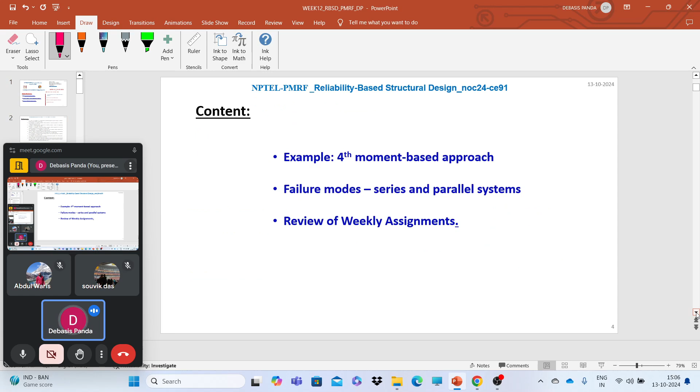So first, the fourth moment based approach, FORM. You have already gone through the lectures of week 12, so you will find that the course instructor has described 40 years of development of FORM, but we will not go into that. We have already gone through the Hasofer-Lind reliability index and how to solve the first order reliability problem using the Rackwitz or Rackwitz-Fiessler algorithm. We are very familiar with that, so we will not spend more time on that.

So basically, the 40 years of developments covered by this course: first the definition of the Cornell reliability index, then the limitations of this reliability index, that if we change the format of the limit state function, the final estimate of beta may change. Then the Hasofer-Lind reliability index came, and this lack of invariance problem was addressed.

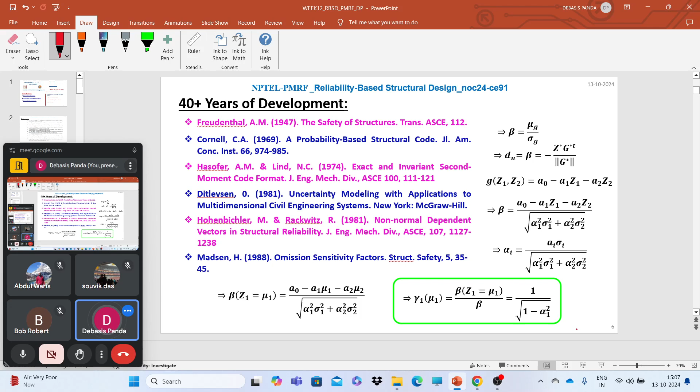We will not go deep into that. You can go into it if needed, but FORM and the simulation based techniques are enough to find the probability of failure and reliability index. This fourth moment based approach is one of the developments done in past years. In 2007 they came up with this approach, suggesting some approximation to the limit state function. We will not go into it directly, we will go to the algorithm.

Today we will focus on solving the questions and figure out which kind of questions we will be focusing on. These kinds of questions will not come in your final examination: what is the Fisher-Cornish expression for this reliability index? And quite frankly, this kind of approximation works for this particular problem. If you try to solve different kinds of problems with this approximation, you will not find convergence.

If someone is interested to find out how we can work out this kind of reliability, they can go through this paper, how they solved it; they also add some examples of how they solved beta. So we are not interested to go there. I added these slides just because of some questions in week 12 associated with this fourth moment based approach.

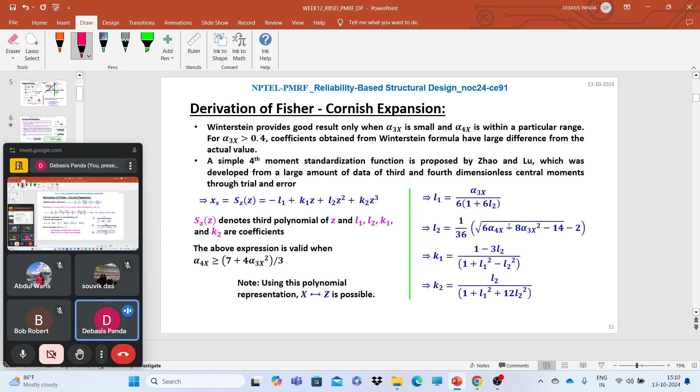If we look into the algorithm, it is similar to the response surface method, but the approximation is different. They start with the limit state function, then evaluate L1, L2, K1, K2. How to evaluate these values is given in the paper. Then evaluate the third and fourth moments. These expressions are also given in their paper, with some limitations, like which domain or range it will act.

Like here for the fourth moment, they have suggested that if this condition is satisfied, then the reliability estimation will closely match the first order reliability estimation using the Hasofer-Lind reliability index. Mostly for the Rackwitz-Fiessler algorithm, we have guaranteed convergence. Then the X to Z kind of expression is also given there in reliability analysis.

So we will not go into that. If we need to solve them during the assignments, then we will come back here and we will see. So main thing, we will first see failure modes. We will spend some time on the failure modes; one or two questions may come from these failure modes. Short, rapid fire type of questions may come from the failure modes.

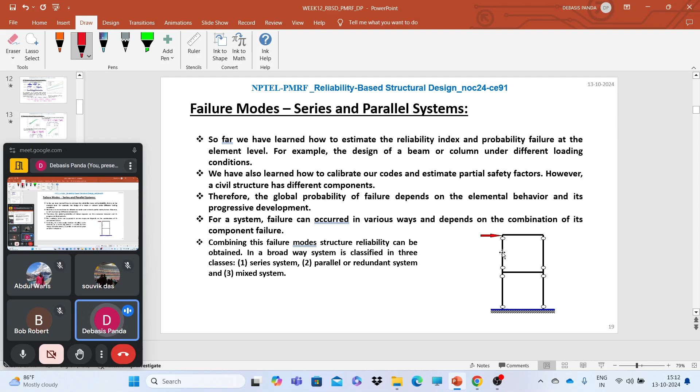Like here for this building, at the element level, for this beam or for this column, we want to solve the reliability. We can first develop G(X) with respect to failure, which kind of failure we are looking at. With respect to that, we need to find out the capacity and demand, and based on that we form our limit state function G of X, and that is nothing but capacity minus demand.

And capacity and demand, like if we want to look into the plastic failure, or for a beam, if we want to analyze with respect to the flexural strength. So different kinds of limit states may form as per our requirement, and different kinds of random variables may be there. So we can work out this local level or element level probability.

Now if we have the whole system, how can we use this information of the element level reliabilities to work out for the whole system? So we need to identify which kind of system we are talking about for global. We can have a series system, a parallel system, or a mixed system. That means a mix of series and parallel systems.

Okay, so here for the series system, what do you know? We have all seen series and parallel systems, like with resistances; we have already learned which kinds of systems we call series and parallel. So series system, what do you know about it? If we have any kind of failure in this system, that governs the total failure of the system, right? So here in the schematic diagram of the series system, we can see that n number of elements are connected in series. If one of these elements fails, then the whole system will fail.

This series and parallel system, what should we discuss? If we have a series system, we know that if one of the elements fails, the whole system will fail. So we can get the probability of success as 1 minus probability of failure of individual components, multiplied together. And if we have a parallel system, what we need to do is just 1 minus probability of failure of the system. That means in series, one of the elements failing causes failure, but in parallel, the rest of the structure will survive until all elements fail.

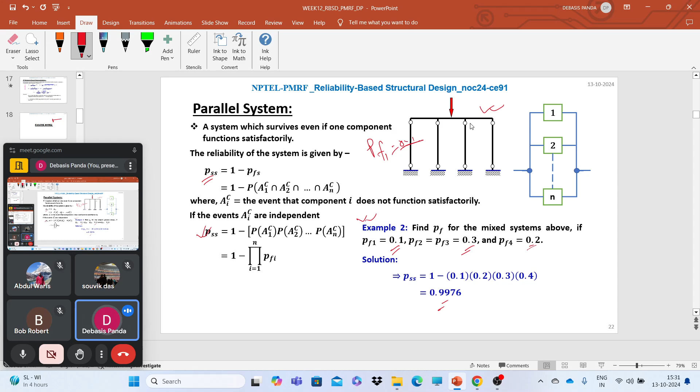But this kind of thing is sort of hypothetical. If one of the elements fails, we will not consider this building as a safe building. Will you go to the building if one of the elements has failed? But my reliability calculation will say, okay, my system will sustain. So we need to figure this out, or if someone wants to go deeper, they can work some examples and check whether this actually aligns with simulation-based techniques or not.

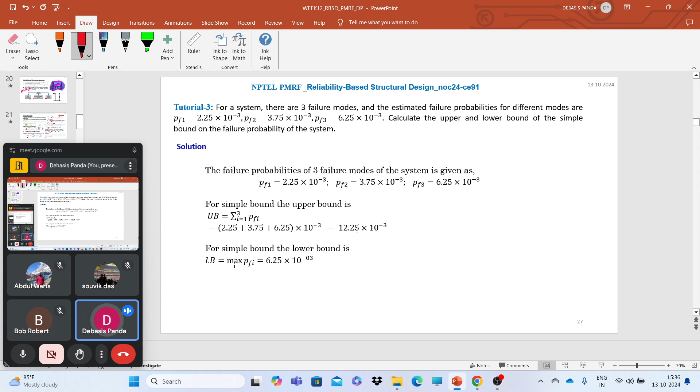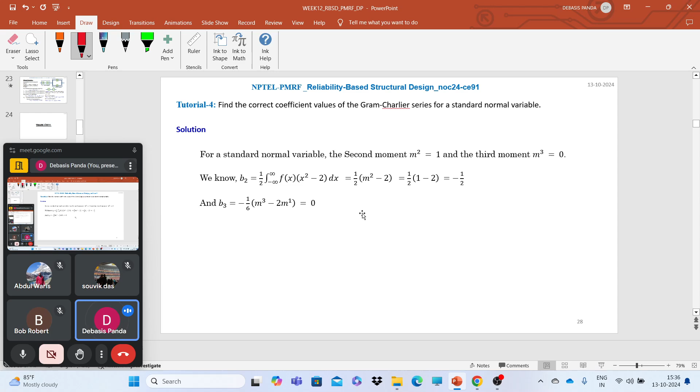Here's a short question. Find out the correct transform technique for a non-normal variable to standard normal variable if a standard normal variable is given. In your lecture video, in the third or fourth lecture, sir has already explained for the standard normal, log normal, and exponential distribution. So for the log normal transformation it's this, and for exponential distribution the transformation function will be this. And this kind of question will not come.

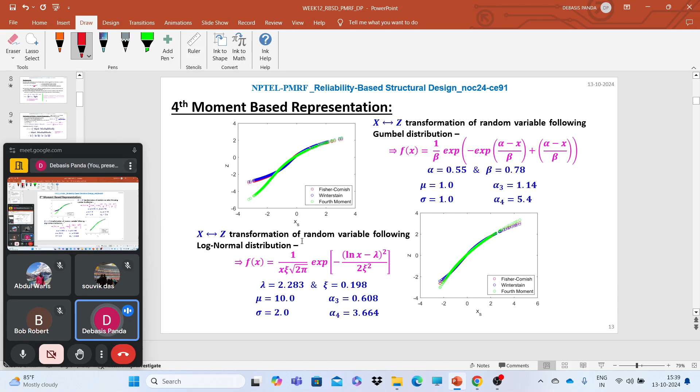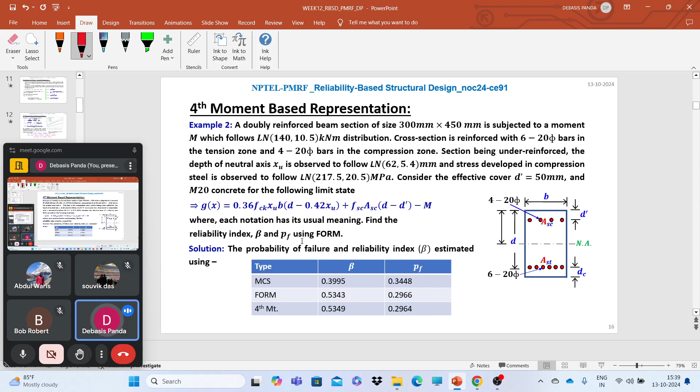But personally, I don't like this kind of representation because I tried it with this frame problem, then this double reinforced beam problem. For these two problems, it gives a close result with FORM and MCS. But when I tried it with the nonlinear problem, it just failed, failed terribly. But you can go into the codes, I will upload the codes for the fourth moment based representation.

But for me, I don't like this approach. If you want them, I will upload the codes, no problem.

Here also for the fourth moment based approach, if you go to lecture 32, you will find out what should be the L1, L2, K1, K2 coefficients. It's nothing but this, so B and C will be the correct answer. That means, select the correct statement about the fourth moment, the proposed standardized moment. This is the limit state function they proposed, so B. And what are the limitations?

The limitation is like this: above this range, the fourth moment, which is nothing but the kurtosis of the standard normal distribution, the kurtosis value is 3. And if the kurtosis value is 3, this fourth moment based approach will give an infinity result, meaning it will terribly fail. So this is actually the limitation of this fourth moment based approach. It's valid when alpha 4x is greater than 7 plus third moment squared by 3.

That means in a way they limit the fourth central moment below 3. That's all. If you go to that slide, you will find the detail about the fourth moment based approach.

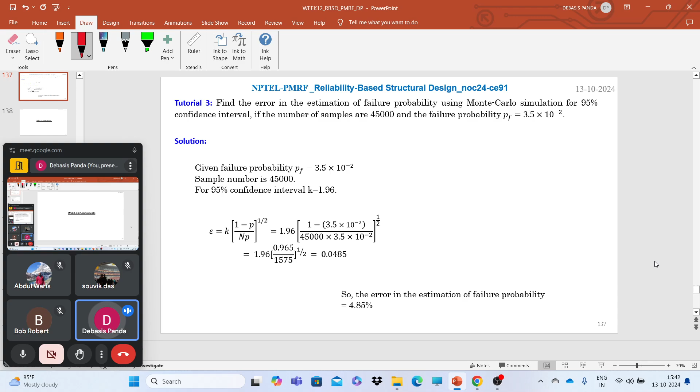If we have our model ready in mechanical APDL or SAP, we can use MATLAB in batch mode to find out the delta in each iteration. If we have time, I will explain it, or I will directly upload the codes, both the implicit form and MCS. You just go through it, the code is self-explanatory. You just need to install mechanical APDL and MATLAB in your system.

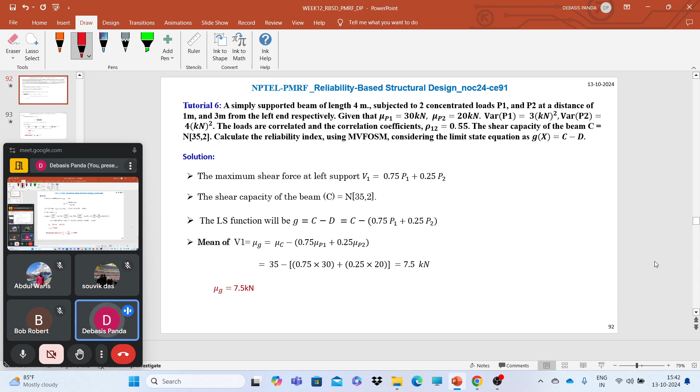So quickly let's go to our main discussion, like which kind of questions may come in the final examinations. For week 12, we haven't spent that much time, we just went like a bullet train. I hope you can figure it out, all the questions I have discussed, you just put them in your assignments and get it done. Now, first thing, the discussion.

So in your final exam, you will have 40 multiple choice questions, like rapid fire type questions, 1 mark each. And all the questions, more than 90% of them will come from your assignments.

Multiple choice question means 1 mark questions, I'll show you which kind of questions. Now you will have numerical and MSQ type questions, 15 questions of 2 marks each. Here, for the MSQ type questions, you need to pay more attention, like 2 or 3 options may be correct. So you need to focus on which options are actually the correct answer.

And you have 10 questions of 3 marks. And I can tell you, if you solve the questions up to week 5 and week 11, those are the most important questions. And I can assure you, if you solve all the assignments and all the problems I have given here, you can solve more than 99% of the questions.

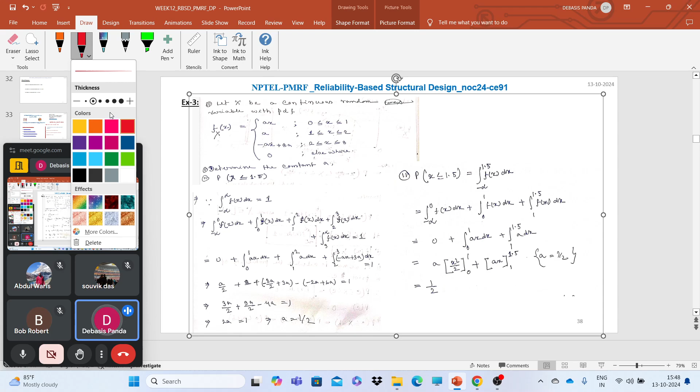Second, one question will come for the continuous random variable, the PDF will be given, the probability density function will be given. Over the range, some constant will be there, you need to find out the value of the constant. Now what is the approach to solve this question? It's nothing but, we know, for the whole domain, the integral of my PDF f X of x dx will be 1.

So if this kind of question is given, like f X of x over the range 0 to 1 given as ax, over the range 1 to 2 given as a, over the range 2 to 3 given as minus ax plus 3a. So what you need to do, you need to integrate all the things and equate to 1, because we know the area under this PDF is always 1. I am here drawing the normal distribution, but for all distributions, the PDF over the range integrates to 1. So you need to figure out what should be the constant.

Now once you have identified the constant, for a point like 1.5, what should be the probability of failure less than equals to that? That means you need to just integrate up to that point. Like here if we have 1.5 value, what should be the probability of failure less than equals to that value. That means you need to calculate the area under this curve, you just need to integrate up to that point.

Okay, if it is the standard normal variate, that means you just figure out phi of that point, x minus mu. Clear? So this kind of question, a 3 marks question, will come where you need to find out the value of this constant a, and you need to figure out for some interval or some point what should be the probability of failure. Clear?

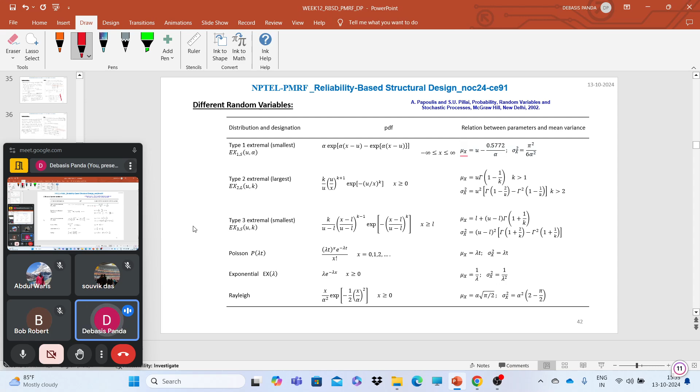So for distributions you need to recall first the exponential, type 1 largest, type 1 smallest, and the log normal distribution. Clear? The parameters associated with those 4 distributions you need to recall. You need to remember.

And the third type of question is for the standard normal variates. Here the standard normal table will be given to you, like for the range. You already have seen in your assignments, phi and z values will be given. All these things will be given, mu, sigma. Like for this M25 grade of concrete, it follows normal distribution with mu 31.57 and sigma 4.32. What will be the probability of getting a strength less than or equal to its design value? The design value is 25.

So here what you need to do is just phi of x minus mu by sigma, where x is the desired value here, that is 25. This is the mean, this is the standard deviation. The phi of this value you will get from the standard normal table. Sometimes you need to do some linear interpolation, but I think in the questions there is no need to interpolate the phi value to get the answers, but this kind of question you will see.

So from the first modules you will get more than 60% of the questions. First 3 modules, more precisely. I'll come to it. So three types of questions from here you need to recall. For the log normal distributions also you can find it out. Similar kind of thing, phi value. Just recall this final expression for normal and log normal.

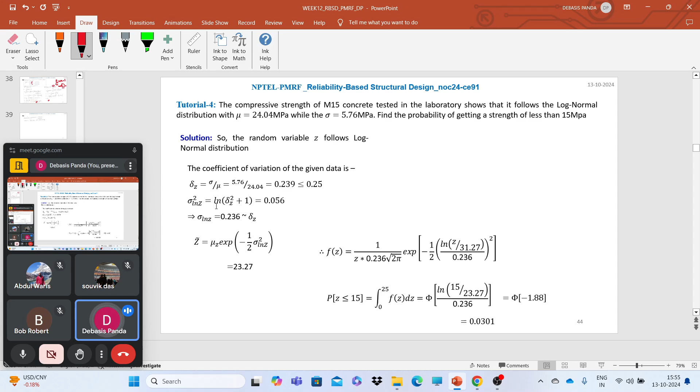So two types of questions. One, for the normal distribution it is nothing but phi of x minus mu by sigma. For log normal distribution, phi of ln x by x tilde over sigma ln. That means you need to find out the x tilde value and sigma ln. A while back I already told you that for this distribution you need to recall the parameters. And exponential distribution. What is the exponential distribution? I need to figure out the exponential distribution.

That rainfall question we have already solved. That question, just go through it. And one more thing here. Yes, this kind of question: what should be the mean and variance? This is nothing but a question from the algebra of variance. How we find the mean and standard deviation for this kind of question: it's a linear system.

Here the total load for a column is given. Your limit state function is given as S, dead load, live load, wind load, and dead load follows normal distribution, live load follows normal distribution, and wind load follows normal distribution. Find out the mean and standard deviation. That will be a 3 marks question. How can you figure it out?

The mean: it's a linear equation, so mu of D, mu of L, mu of W, just add all the mean values. What will be the variance? It is nothing but sigma square L, sigma square D, sigma square W added, and you will find out the standard deviation from this. Now once you have found these two, you can easily find out the probability of failure. That means all the things we need to recall are actually linked to each other.

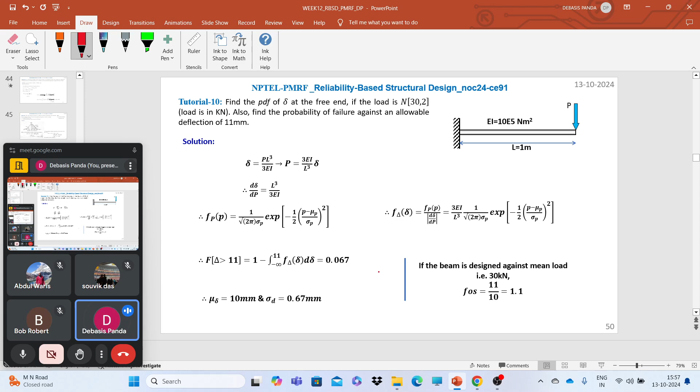For distributions, out of these four, two distributions are very much important: normal and log normal, then your exponential. And for the type 1 largest, you need to find out the parameters. Three types of questions. Now this is a similar kind of question. It's a nonlinear equation, so you can find out mu and delta according to it.

Here is this question. Now look, here we have a limit state function S is equal to M by Z, P by A, M, P, A. The distributions of these things are given along with the parameters. Now what should be the variance and mean of these things? So mean is nothing but mu M by mu Z, mu P by A, because A is your deterministic quantity. So we can easily find out the value of mean.

And what should be the sigma square value? It's nothing but 1 by mu square. That means 1 by mu Z square into sigma M square plus. That means you need to find out the derivatives of these things and add them up, and you will get the final expression. So variance of these things, when we have a nonlinear function, we need to get the derivative with respect to the random variable, and put this in this equation. So when i is equal to j, you will get the square term.

So this problem, just recall this problem. Already we have discussed this problem in week 1, during the week 1 assignment solving session. Now one more thing, these are all the same kind of things. If my limit state is given, what should be the mean value? This will be my mean value. What should be the variance? Nothing but del MR by del B square into sigma B square. That means you need to find out the derivative with respect to the random variable and multiply it with the sigma square of this particular random variable. That's all.

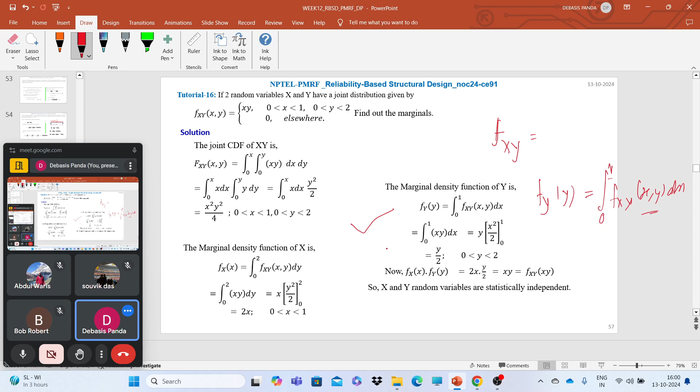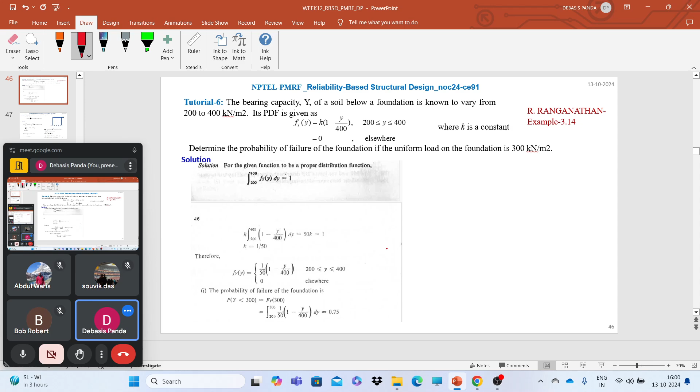Great. Okay, so from week 1, the kind of questions you need to recall or practice are these. If you practice these questions we have already solved, you can solve 100% of the questions given from week 1, and week 1, week 2, week 3 have the most weightage. Okay, clear which kind of questions you need to practice from week 1? Yes. Okay, great.

So move to week 2. In week 2 we have moment generating function, method of moments, and maximum likelihood function. Now from goodness of fit, like chi-square and KS test, you will have one or two MCQ type questions. And one question will come from the moment generating function, because in our assignments the weightage regarding moment generating function is given mostly. So I will show you some examples.

Like here we need to find out the moment generating function for the discrete random variable. So recall how we can find out the moment generating function. Moment generating function is nothing but the expectation of e to the power xs. So if we have the PDF on our side, e to the power xs we can easily find out, but this kind of bigger expression will not be given to you, where you need to solve the integration. But if this question is given, how much time will you need to solve it, tell me?

So you can expect one question from moment generating function. So just go through the moment generating function questions, whatever we have discussed during week 2, like this question, and we have again this type of questions. If we have a discrete random variable, the PMF is given: for x equals 1, it's 1 by 4, for x equals 3, 3 by 4.

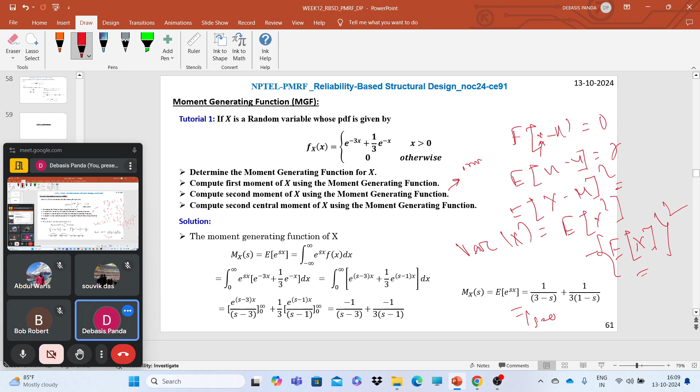And what will be the second moment about the origin? The second question asks to compute the second moment using the moment generating function. That means you just need to get the second derivative of the moment generating function with respect to s, and at s equals 0 you will get the second moment about the origin.

So here you can see the second derivative of the moment generating function with respect to s. Now if you put s equals 0, you will get this. So this is nothing but the second moment about the origin. Once we have the second moment about the origin, you can easily find out the second central moment, which is nothing but the variance.

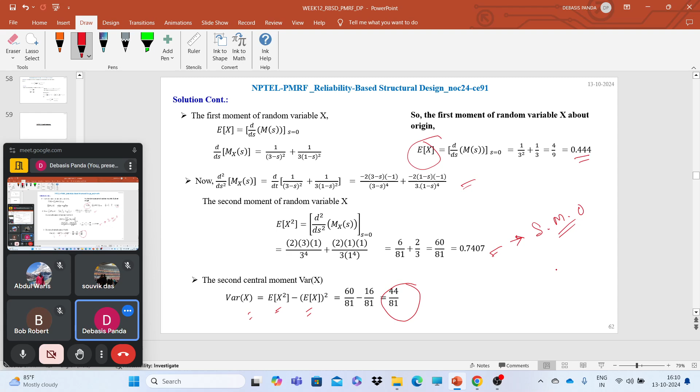Variance from variance algebra is E of x square minus E of x the whole square. So we have E of x and E of x square, the mean and mean square value, and we can find the second central moment. The first central moment is always 0, the second central moment is the variance, the third is skewness, and the fourth is kurtosis. So mean is always the first moment about the origin. Okay.

Now here you can have a 1 mark or 2 marks question on biased and unbiased estimation. The estimator, or the sample estimator, will be given to you, and the question will ask which one is the unbiased estimate of the mean or of that parameter. This kind of 1 or 2 marks question may come. Like here you have already solved z1, z2, z3.

If the expectation of the estimator is equal to the population parameter we are looking at, then we can say this is an unbiased estimate. If these two are not the same, that means the expectation of the estimator is not equal to the parameter, then we can say this is a biased estimator. So here two estimators of z1, z2 up to z9 are given, theta 1 and theta 2. We need to find which one is the unbiased estimate of the mean.

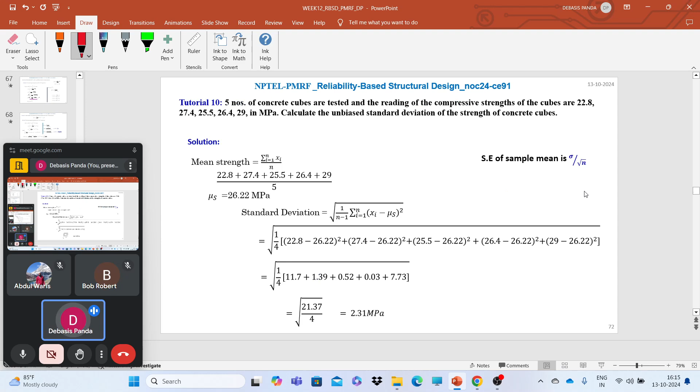Also just recall this, for the sample mean and sample variance, what should be the unbiased estimate. So for the sample variance, the 1 by n minus 1 summation of x minus mu whole square for each sample, that will give us the unbiased estimate. This is a 1 marks question. And from the method of moments estimate, here it's nothing but you just add them up, you will not get that.

Now, you will get 2 or 3 questions from the maximum likelihood estimate. 1 marks question you will have from maximum likelihood estimate. Again, you will have a 3 marks question from the maximum likelihood estimate. So here what you need to be

careful about is the questions - you just read whether you are asked to find out the log likelihood function or the likelihood function. In one question it may ask like what should be the likelihood function. For the likelihood function, you just need to multiply them and find out the thing. Here you can see, and for the log likelihood function, you need to add the log on both sides. So from here, likelihood and log likelihood function, you will have 2 to 3 questions.

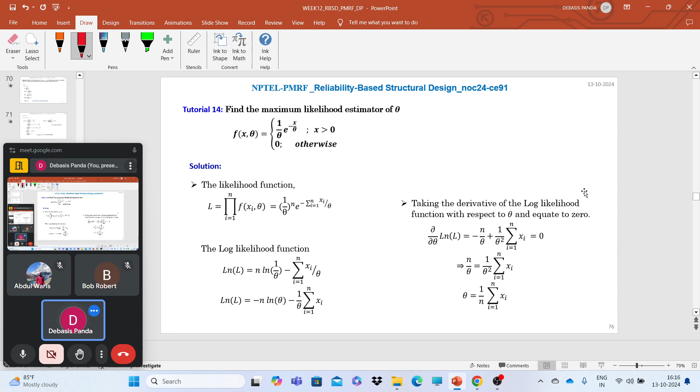2 questions of 1 marks, and I think 1 or 2 marks question may come from this topic. So already we have figured out different kinds of questions here, and all the questions given in your assignments, you just go through them one by one. Already this kind of questions are given, like what should be the likelihood function, what should be the log likelihood function - very simple type of questions. All the answers will be given. You don't need to find out the parameters, but you will be asked what should be the expression for the likelihood and log likelihood estimate. Clear? Likelihood and log likelihood estimate.

And be careful - in the options, both the likelihood and log likelihood correct answers will be given, so be careful with the answers. So from the log likelihood function, you can expect 2 or 3 questions - simple type of questions, what should be the likelihood function, what should be the log likelihood function, that's all.

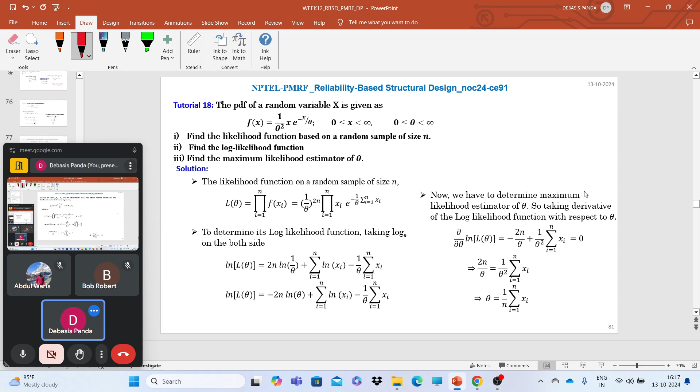Now from week 3, you will have most of the 3 marks questions. First, most of the 3 marks questions will come from week 1, like what should be the mean and variance for a given system, what should be the probability of failure up to this point, what should be the k value for these things. So 2 or 3 questions you can directly expect from the first module, and the rest of the things from the MVFOSM and the definition of Cornell reliability.

That means first you need to figure out what should be my mu and what should be my sigma of the limit state function, and what should be the beta. So for this question, you can easily figure out what should be the mean and standard deviation of the limit state function.

So the limit state function is given in this format, and the format also will be given to you, which format you need to follow. Like here, if I change the format to 1 minus d by c, the estimate of beta will change. That actually leads to the lack of invariance problem, right?

So this kind of question, 3 marks question, will obviously come. I think this kind of question will come, like the axial load carrying capacity of column is given, the capacity is given, the demand is given, the limit state is given. So what should be the reliability index for this problem, and you need to enter the range of this value.

Okay, so for this problem you have the limit state function c minus d. So what will be mu g? Nothing but mu c minus mu d. Already we have the parameters corresponding to the distribution, so I can easily find out what should be my mu g, what should be my sigma g. It's a linear function, so it's nothing but sigma c square plus sigma d square, so I can get the standard deviation.

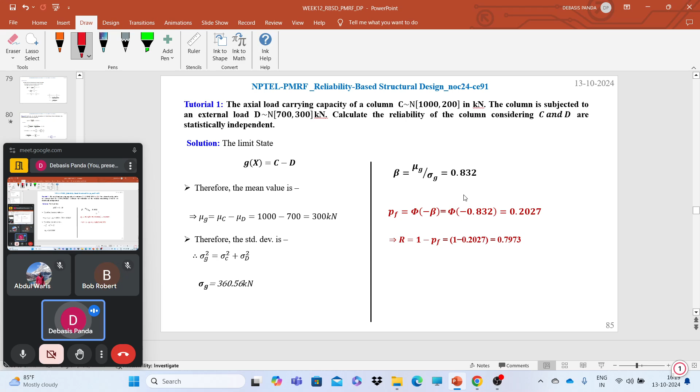Once I have the mean and standard deviation, using the Cornell definition, it's nothing but mu g by sigma g. Now further, if asked what will be the probability of failure, obviously in a tabular form the phi value will be given, but we will not go up to that. So up to this, what will be the beta value corresponding to that limit state function? This kind of question will ask.

Okay, so for this big question you just don't need to go far, like a simple kind of limit state will be given, where you can solve it within 2 or 3 minutes.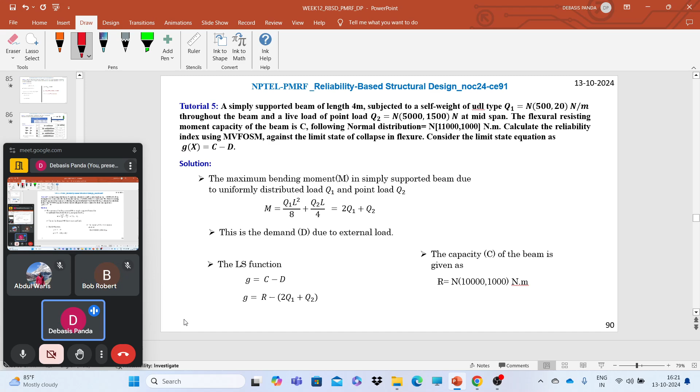Okay, 3 marks question. Here also we have another question, like here the covariance is given. So if covariance is given, you can also find out what should be the variance, mean and variance, and the corresponding beta. Great, okay. So beta from reliability index, 3 marks question.

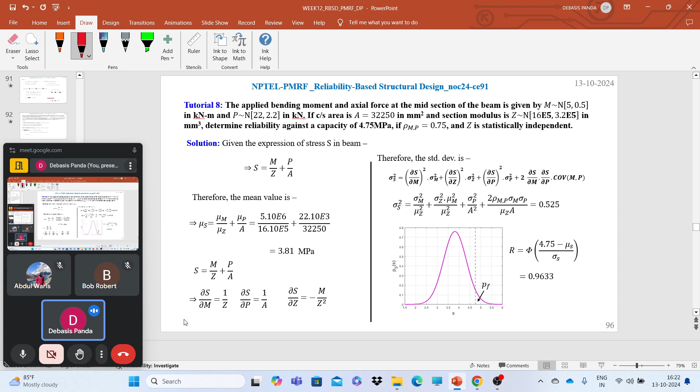Here also, just go through these 3 or 4 problems added here, just go through them. Already we have discussed these things. This question is also important. Okay, mu you can find out, sigma you can find out, beta you can find out. Now from week 4 we have the FORM.

Now the big question, from first order reliability method, which kind of question may come here? Very simple kind of question will come, like here this kind of question. Your z will be given directly, the gz will be given, your alphas will be given. Calculate the beta for the first iteration, and your limit state will not be this big. It will be a simple linear limit state where we just need to find out the beta value.

That means what you need to do, already if it is given in the z space, obviously it will be given in the z space, because from x space to z space you need to convert it. So it will take some time.

So I think directly the z-space limit state equation is given in z-space already, in a simple format, you can easily find out the beta, and beta will have only one equation. You will not have any quadratic equation where you need to solve for beta and get 2 or 3 values. You will just get one value.

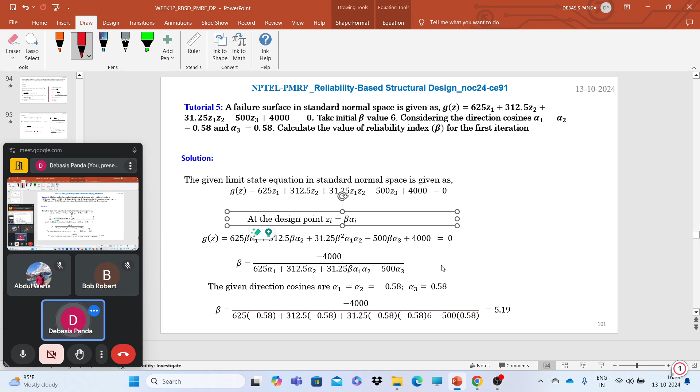What you need to recall here is that in design points, z i equals beta into alpha. We have already seen this many times when we solved using the Rackwitz-Fiessler algorithm. And already we will have alpha 1 and alpha 2. Another kind of question here could ask what should be my alpha 1 and alpha 2.

Say for example, your gz is given like this: my gz is 20 z1 minus 6 z2 plus 220. Now here what will be asked is to calculate the direction cosine of the first random variable.

First random variable means you need to find out alpha 1. So alpha is nothing but minus the gradient of the limit state function in the standard normal space with respect to that random variable, that is dg/dz1 divided by the gradient of g, meaning the Euclidean norm of g. Most of the time the Euclidean norm will be given; if not, you need to find the two derivatives, dg with respect to z1 and dg with respect to z2, and the Euclidean norm is the square root of this square plus that square. Once you have this, you can easily find alpha 1.

And if asked what will be the value of alpha 2, you can easily find it out too. It is nothing but dg/dz2 divided by the Euclidean norm of gz. So this kind of question you may expect.

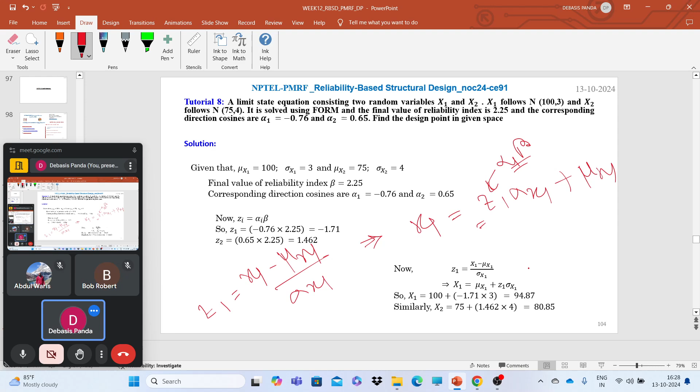This kind of correlated to uncorrelated conversion, you will not have any kind of questions on that.

Now, from week 5, the Hasofer-Lind and Rackwitz-Fiessler algorithm, similar. Like here also, same kind of questions. So you may have three questions from this, and from Cornell's also you have three. That's why I told you, up to the fifth week of assignments, if you solve this kind of question, you can solve 70 to 80% of the questions.

Like here also beta, similar kind of question. Look at the question here, the limit state is given, you just need to convert it into z space. So directly in your questions the g(z) will be given, you need to find out the beta. So you can easily find out the beta here. That means all the values will be given, you just need to recall or remember what was my logic to find out these things, and the simple form of limit state will be given.

Don't worry, these two, this also you can solve. Don't look at the solution, can you solve it within 3 minutes? If this is asked for a 3 marks question, although the limit state is longer here, this kind of limit state will not be given. Like limit state is given, initial beta is given, initial alpha is given. What will be the beta for the first iteration? For the first iteration, you don't need to solve any quadratic equation, it will be a simple linear equation.

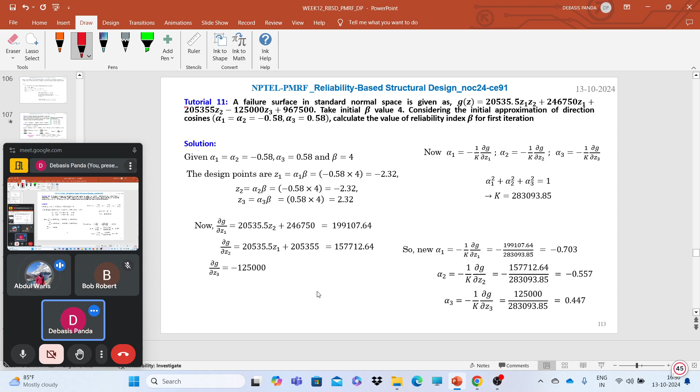Okay, so now you have an idea which kind of questions will come up to this module. Yes or no? Yeah. Yeah. So then

Log normal distribution, I have already told you. This kind of question, a 1 mark question, may come from this, like what should be the equivalent normal. Only for the log normal distribution you just need to recall what should be the equivalent normal, that equivalent normalization equation here, mu x equals x star times (1 minus ln x star plus ln x tilde). The value will be given, like x star value is given here, the standard deviation and mean are given here.

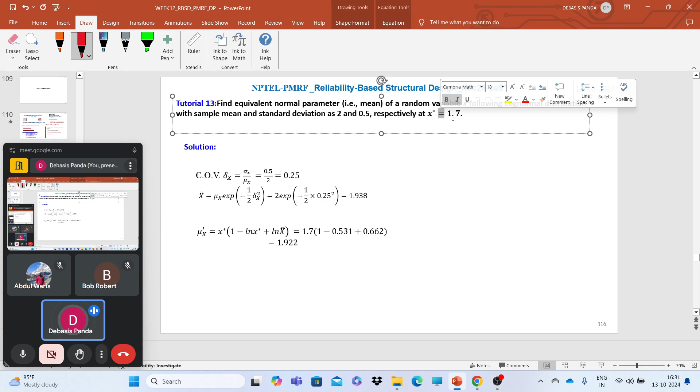So you need to find out the del value first, you need to find out the x tilde value, and you can find out the equivalent normal point for this x. So a 2 marks question or a 1 marks question may come here. If del and x tilde are given, the question will be 1 marks. If you need to calculate these two things, you will have a 2 marks question. That means, according to the four distributions I have told you, you can solve any questions, right? So this also you just go through.

So it's a simple question, and this is only for the log normal distribution, not for the uniform, not for the Gumbel, not for the type 1 distribution. It's a simple expression, x star times (1 minus ln x star plus ln x tilde). So this kind of question may come, but I suppose this question will not come, because the ln value you cannot solve using the on-screen calculator.

I don't think so. Ln is there, no? On the on-screen calculator, you can solve ln. Not sure. I think it's there. Yes, maybe. You can solve it.

So just recall this expression, what should be the equivalent mean for the log normal distribution. Okay, so this kind of question is hardly a 1 or 2 marks question. If all the values are given, then that question will be 1 marks. If all the values are not given, then this question will be 2 marks.

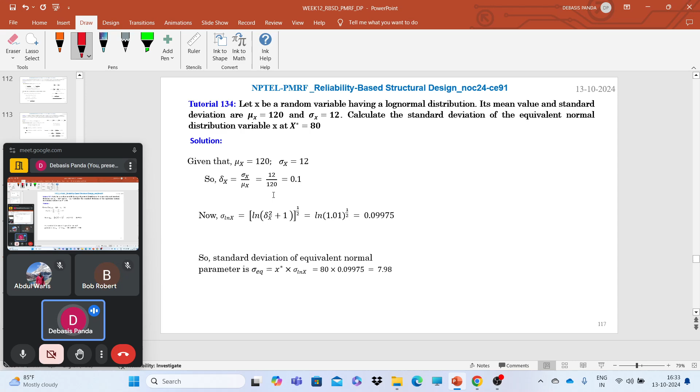So these two questions you just recall, or you just go through them. Okay, this kind of question you will not have, because you don't need to solve the eigen operations. Now, in the Morgenstern and Nataf model, you will have just MSQ questions and simple theoretical questions. You will not get any kind of numerical questions. But one question I will recommend: just recall this formula.

What is the formula to find out the alpha? That means how we can find out the rho value from the alpha value. That means q1 and q2 are given, so from this formula, how we can find out the rho 1 2 value. If x1 and x2 are marginally normal and exponential distributions, and q1 and q2 are given, what should be the correlation coefficient? We know that mod of alpha is less than or equal to 1, and alpha is nothing but rho 1 2 divided by 4 q1 q2, less than or equal to 1.

This formula, all are given. What will be the rho 1 2? That means the correlation coefficient between these two. These two formulas, please recall. That's all. And the 1 mark questions associated with week 6, all the 1 mark questions you should go through them. 1 mark and MSQ questions, related to which statements are correct. Okay, that's all. The rest, you don't need to remember any kind of transformations, Nataf or Morgenstern.

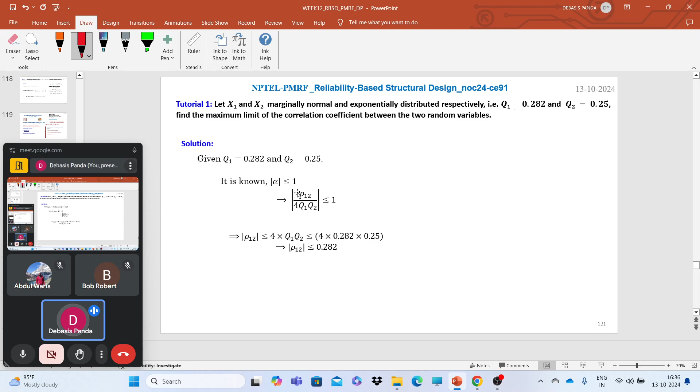First, if we have two random variables, what should be the rho 1 2 if q1 and q2 are given? All values will be given, q1 and q2, you just need to find out what should be the rho 1 2 value. That means what should be the maximum value of rho 1 2 with which we can work with the Morgenstern model. That's all.

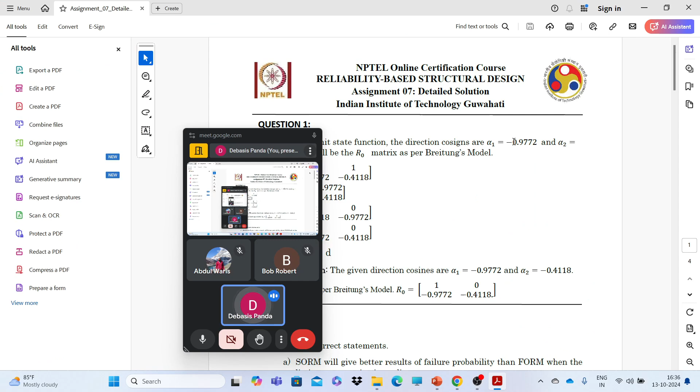Now, from second order reliability, again, you will have MSQ type questions. I will go to week 6, week 7. You have the assignments of week 7. I also have the assignments of week 7. Just wait a minute. Your assignments, actually, the assignments given to you, the MSQ type of questions. Like that is the solution, whatever is given to you.

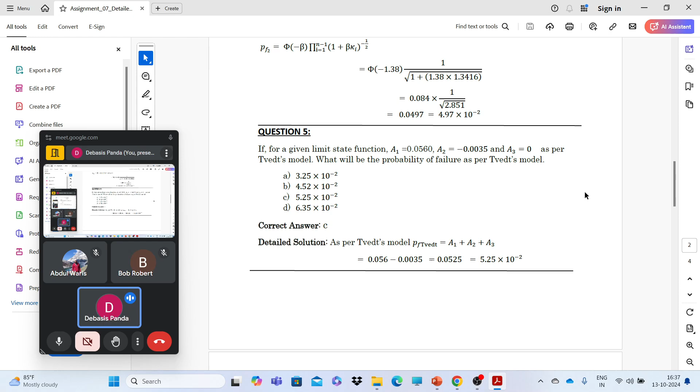So here what you need to recall, all the MSQ type questions, 2 mark questions, which one is the correct statement, right? Already we have discussed all these things, you know this very well. And one thing I will suggest, like what is the Tvedt model, if A1, A2 and A3 are given, 1 mark question, you can easily find it out, right? That's all, these two kinds of questions.

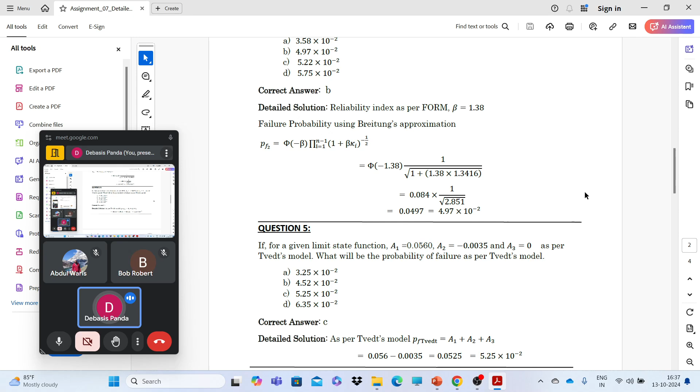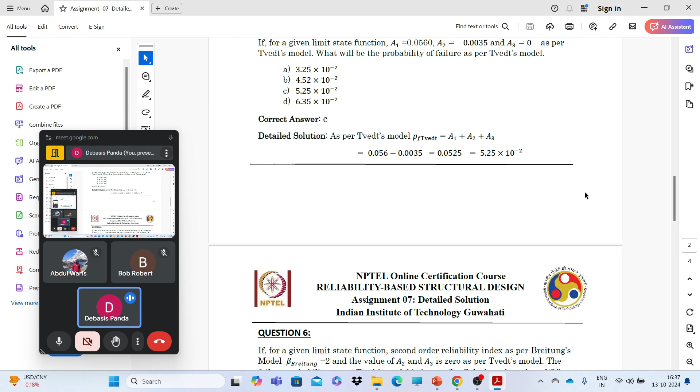And if there is only one beta and one kappa, and phi of beta is given, what will be the probability of failure with respect to the Breitung model? You can figure it out, right? Phi of minus beta times 1 plus kappa beta, but I think that kind of question will not come. Still, for the Tvedt model, this expression PF2, the PF is equal to A1 plus A2 plus A3. If A1, A2 and A3 are given, you can easily find out the value corresponding to Tvedt.

But the MSQs, okay, just read them carefully and solve them. Which are the correct statements? Okay. And here, what was the D vector for? It is nothing but the second derivative vector. So if the limit state function is given, you just need to find out the second derivative with respect to the standard normal variates, and you can find out the D matrix and the terms of the D matrix.

So if this kind of question comes, you can figure it out, right? So this kind of small question will come from the SORM, and more precisely MSQ, Tvedt model A1, A2, A3 for 1 mark, and the derivative D matrix. Here the D matrix is also important. For the D matrix, a simple form of limit state will be given.

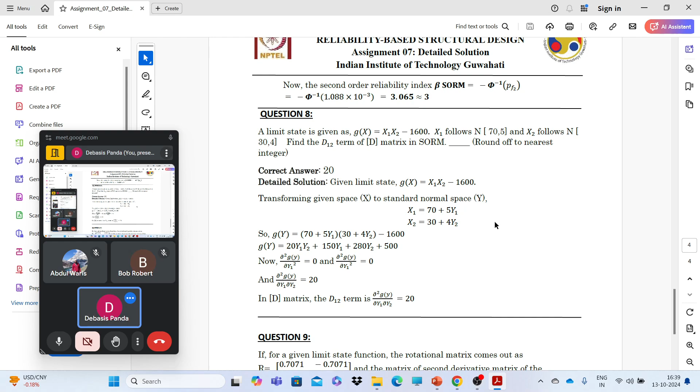What you need to do is find the second derivative of this limit state function in the standard normal space with respect to the first random variable and second random variable, which will form your D matrix. Clear? Great. Now move to the week 8 assignment. I have added a few questions here, just go through them. Look, for the D matrix I have added one question, you can easily find what the D matrix should be, right?

That's all. The R matrix you don't need to find, because of the matrix operation there; you don't need to figure out the final values. The motto is not to give you this matrix operation; we can easily do it, but it consumes time and will be problematic to solve during the examination. So this kind of question will not come. But the elements of the D matrix may come. Some sort of limit state will give a 3 marks question, not 1 or 2 marks. A 3 marks question may come from here. Right?

Like, which ones are the correct statements? We have already discussed these things, so just go through it, you will find out. So one MSQ 2 marks question; for the Tvedt model, if A1, A2, A3 is given, a 1 mark question. And if one limit state function is given, what should be the elements of the D matrix? Like what will be the d11 value, what will be the d12 value? d11 is nothing but the second derivative of the limit state function in the standard normal space with respect to the first random variable in the standard normal space.

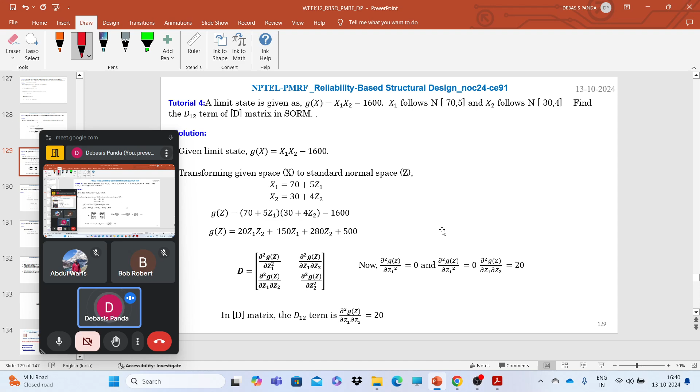That's all. The derivations will be very simple, you can easily get it. Either it will be 0 or in the cross term you will have some term. That means you can easily find the derivatives. Great. Now week 8. Here from the Monte Carlo simulations, the simulation based technique, again you will have mostly MSQ type of questions.

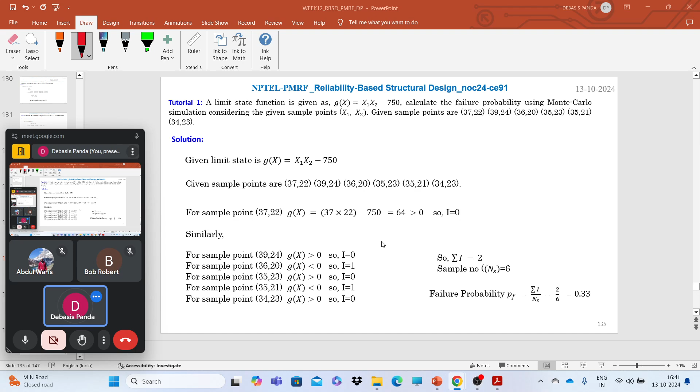And for this type of question, a 3 marks or 2 marks question, a limit state will be given and some sample points will be given, like 3 or 4 sample points, and you find the probability of failure. A simple limit state will be given. Using the sample points you need to evaluate g(x) and check how many times it fails and how many times it passes. So your probability of failure will be the number of failures divided by the total number of samples. That means you can easily find it. Clear?

And for importance sampling and adaptive sampling, I think you will not have any numerical type of question, but you may have a 2 marks MSQ. And just recall this formula. The error and k are given, you need to find n. Simple values will be given, like probability of failure, error, and 95% confidence interval. Find the n value, the number of samples. So you need to recall this equation from this module. I have added a few questions here, just go through them.

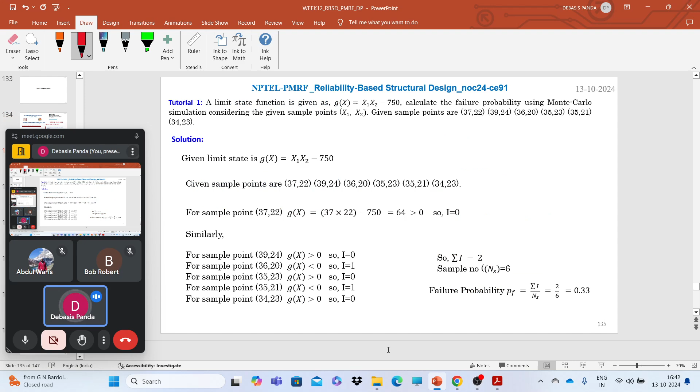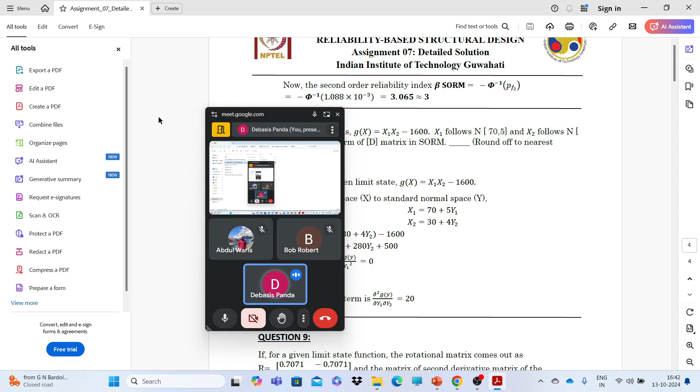Okay, this is week 8. Now let's go to week 9. Week 9 also you will have 1 mark and MSQ type of questions, mostly 1 mark questions. It's response surface and stochastic response surface, all these things. So you will have MSQ type questions, one or two questions may come from here, or less. This is week 8, we just need week 9. And from week 11 you will have 2 or 3 questions. It's very simple. I'll go to that.

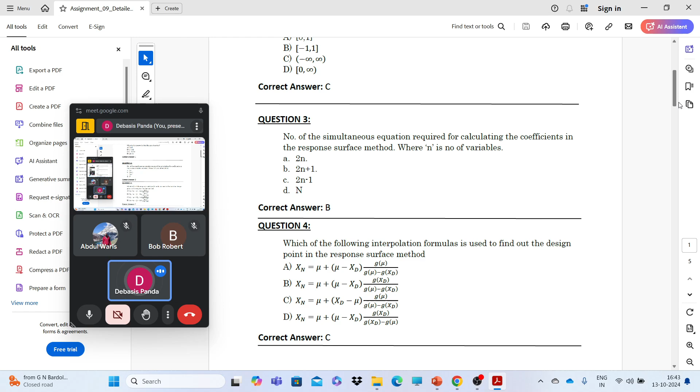Yeah, so most of the 1 marks questions will come from here, like what should be the interval from the Hermite polynomial; you just recall it. So 1 marks questions and MSQ questions from this module. This formula you should recall. What is the new design point for it? The interpolation formula. But no numerical things will be asked, like this kind of MSQ question.

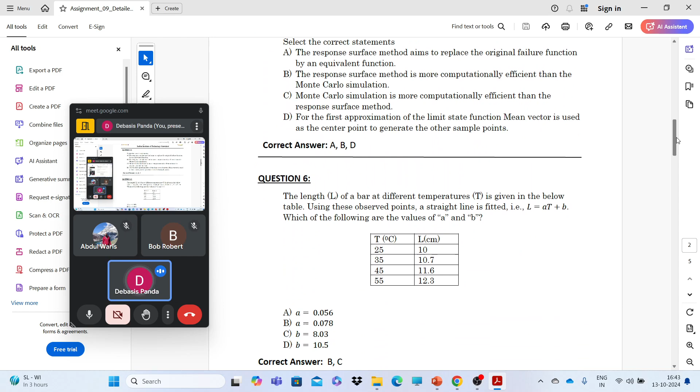Only MSQ type of questions will be asked from this module. MSQ and 1 marks questions. Okay, you don't need to figure out what should be the polynomial, orthogonal polynomial; you don't need to recall these things.

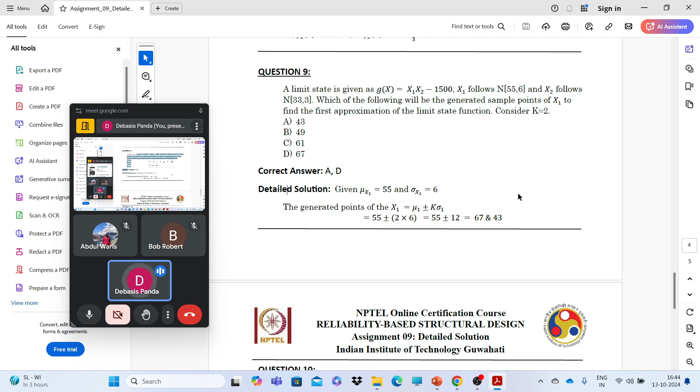Here you may be asked what should be the support point generation scheme for this mu plus minus k sigma. So if the mu and the limit state function are given, what should be the points, or how many points we will get here, 2 points from here. So MSQ type of question may come from here. So MCQ or MSQ, these questions you just need to recall. Okay, all the MCQ and MSQ questions from this module.

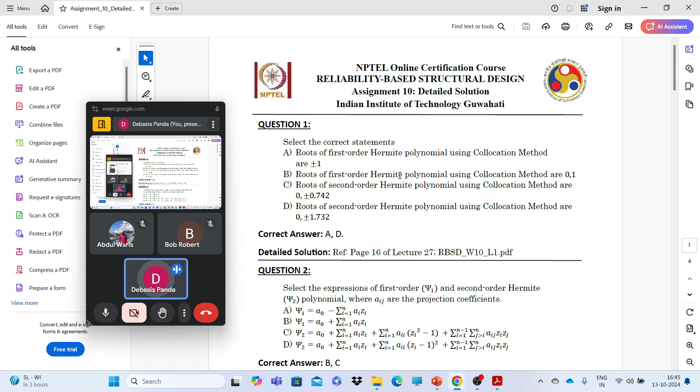Week 10, let's go to week 10 quickly. Week 12, you will not get any kind of numerical questions. But that thing, parallel and series, I just forgot, maybe it will come from there. So here the roots of the polynomial, you don't need to recall it. It will not come. This type of question like polynomial chaos expansion, the correct statements like collocation points, you don't need to recall. Yeah, this thing, this question number 6.

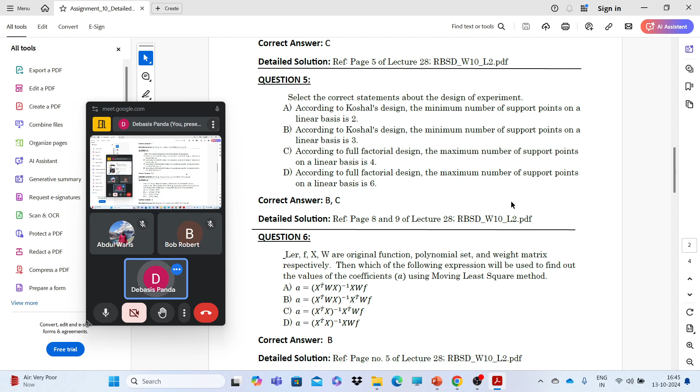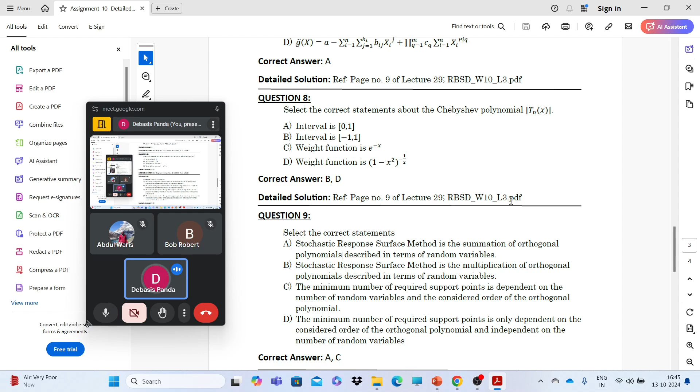What is the difference between least square and moving least square, weighted least square? So for weighted least square, you just need to multiply the weight function with respect to your normal least square approach. That means x transpose x inverse, you need to multiply with the limit state function, and for the rest of the things also you need to multiply it. So this type of question, all the 1 marks questions and the MSQ questions, you just recall all those things from this module.

So it is advised that all modules should be covered. So 1 marks and 2 marks questions may come from this, or mostly the 1 marks MCQ type of question. Okay, now week 11; in week 11 already we have discussed which kind of question may come. I have added some questions here for week 12. You can easily go through it.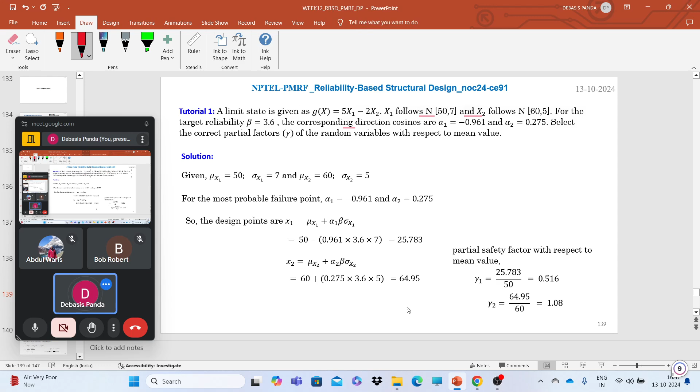So mostly this question, and here in this kind of tabulated format, your mean to nominal values will be given, your design points are already given. You just need to find out the factor of safety with respect to the mean value and with respect to the nominal values. Clear? 1 marks, 2 marks. In 1 marks questions, one table will be given and 2 or 3 questions will be asked. Mean value of this, what will be the nominal value, partial factor of safety with respect to the nominal value, and all these things. Clear?

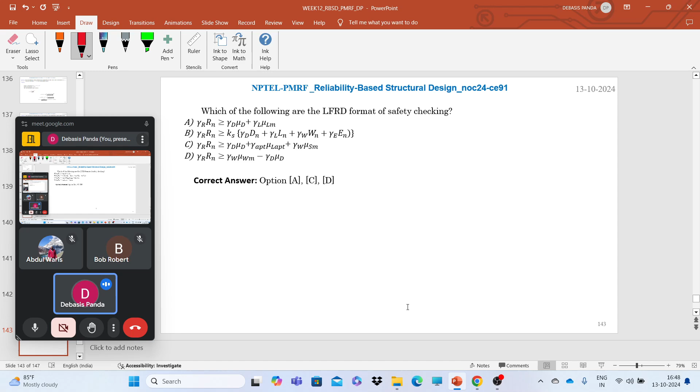And this LRFD safety checking format. What are the 4 equations for the LRFD safety checking format? So one MSQ question; this question you just recall. Here three things are given. So you just recall the 4 equations of the LRFD format. Okay, great. That's all for the final exam.

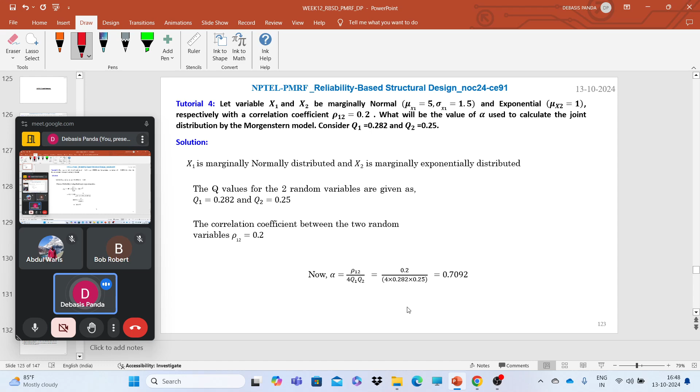Now you have some idea which things you need to figure out and which you need to recall. So let's go to the format of the final exam. I just want to summarize all these things for you.

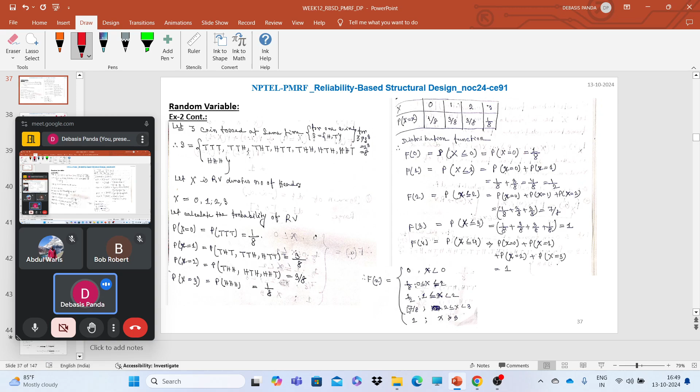From the first 4 modules, you will have most of the 2 and 3 marks questions. Most. Okay. So these 40 MCQs, if you go through all the MCQs given in your assignments, you can easily solve 38, 39, or 40 questions. Great. And whatever we have discussed today.

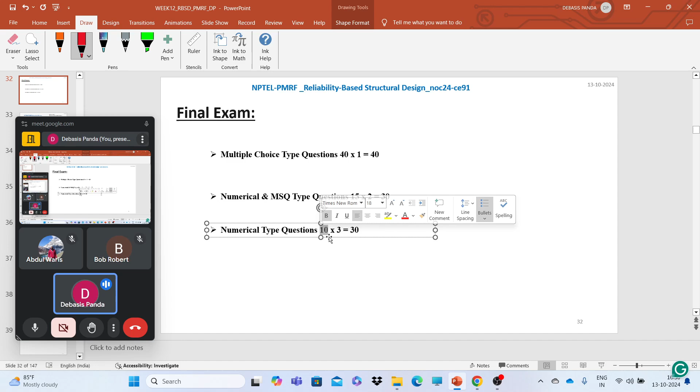Now for the MSQ, 2 marks questions up to the fourth module, and mostly from the simulation based technique, the MSQ type of questions will come. And the numerical type of questions, again 10 questions; out of the 10 questions almost 3 questions will come from the first 3 modules, 4 to 5 questions will come from this, and 3 questions again come from the FORM iterative algorithm, like what will be my beta, what will be my alpha, what will be alpha beta, and what will be my design point in X space.

Clear? Now tell me what kind of issues you have. Now you have some idea, right? Just go through today's whatever I have given here. Just go through it, and the MCQ questions, all the assignments, go through them. But seriously, the final question, you just see the final question, you will laugh. Okay, the course is that tough, but the final exam is that easy. So don't need to worry about it. Just go with that.

But on a serious note, this is a very, very good and very effective course. If we want to do something out of the course, we need to go for some research base or some project. We need to do some project that is reliability based, some design, or we can analyze some structure, we can propose something, or we can review all these things on some structure. That will actually help us. Abdul, you are already working on reliability, Bob, you are already working on the structure. So we need to work on some live projects, or some projects where we can solve the things.

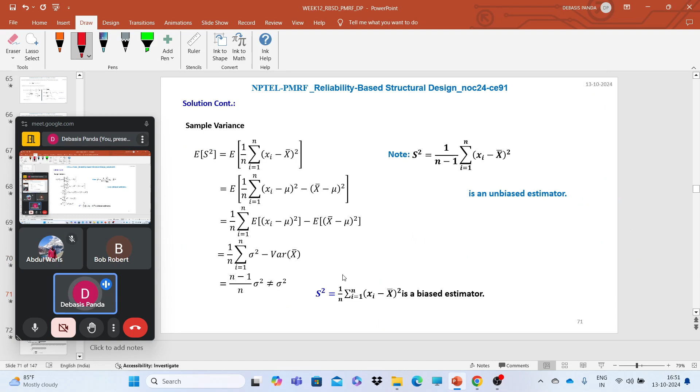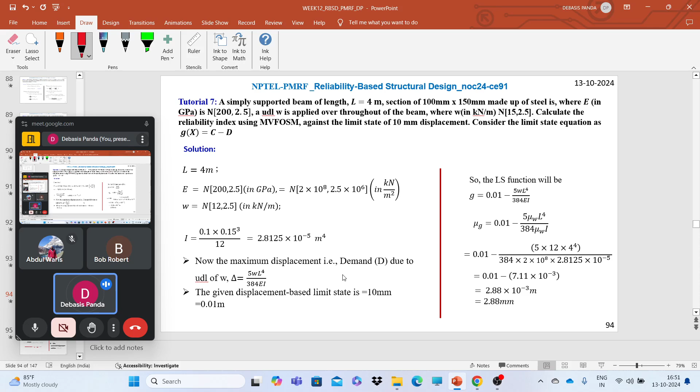Here we have learned the concepts, now we need to utilize them, right? So we need to figure out how we can fruitfully use the concepts and the things we have learned during this course, because this course is advanced and rich with very cutting edge knowledge: how we can develop the reliability, or how we can ensure the reliability for serious structures, or important structures. Like this problem I want to actually demonstrate.

But today, in this kind of frame, if you have any kind of structure, you can give it to me, or we can discuss over some meetings how we can use it, or how we can collaboratively develop some model out of this course. It's not just giving the exam and getting the certificate for this course, yes or no? Yes. Very important. Until we have done something tangible, only then can we say we have learned something from this course, right? So we need to figure it out.

But for the final exam, just after seeing the question paper, you will laugh, comparing the course and the question. And obviously, out of this course, what kind of question can we ask? If we give a MATLAB kind of question, how we can solve it, or how we can solve it with the numerical based or the simulation based technique. So we need to work on some projects, incorporate some knowledge or some reliability approaches into that project, and figure it out.

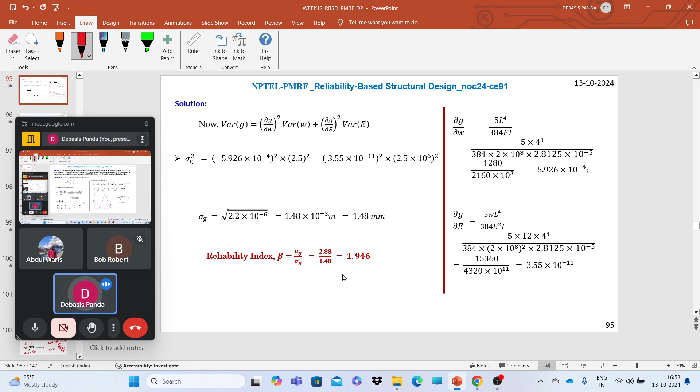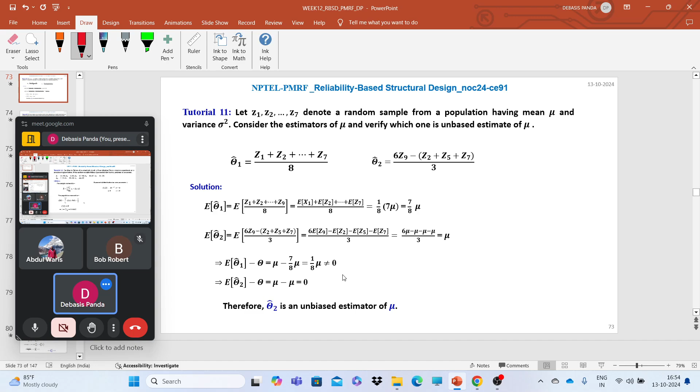This will be my final model for the reliability, or we can propose some schemes like adaptive response surface, stochastic response surface. There are different kinds of approaches; here they have come up with a fourth moment approach, similar to your response surface method, but approximated with some moments. We can also figure it out, or we can simply use the existing model and work with some live project or some structure. Then that will make sense to ourselves. So for that we need to sit, and after the exam we can work it out. And I am also very much interested to do something with this course.

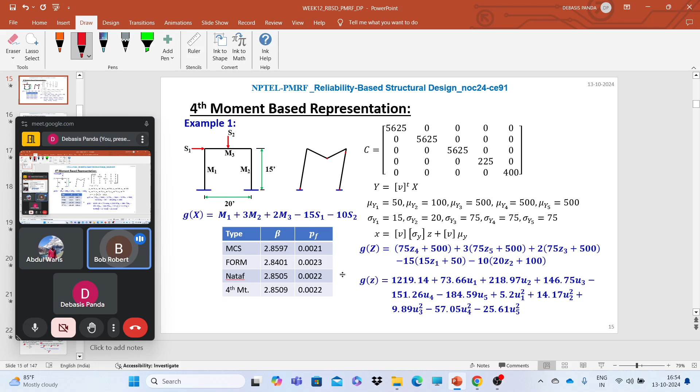Same here, even I'm interested to do that. Yeah, so I'm very, very interested. Actually, I had the same idea. One more thing, like Bob - I'm calling him Bob, but he is very senior to me.

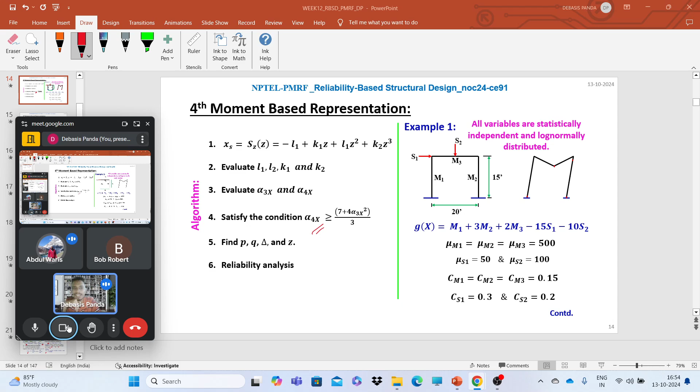He has 23 plus years of experience in structural engineering. Okay, can all of you turn on your videos so we can acknowledge ourselves. Abdul is also a PMRF fellow at IIT Hyderabad, doing research related to slope stability, and he needs to incorporate this knowledge regarding reliability. And Bob is also a structural engineer with almost 23 plus years of experience.

That means he has seen all kinds of situations. So, you people said - what can we do?

I think we need to form a group, and after the exams, have some team meetings to come out with an approach, because I really think it's a very important course, and it is not well practiced now. So yeah, it's a good area to expand.

Particularly in India it's even better to expand - in Africa, I don't think we are really doing much of this, particularly in my country. And I think once we develop it, there will be a big consultancy approach, addressing things in India too, since we're stuck in the deterministic approach till now.